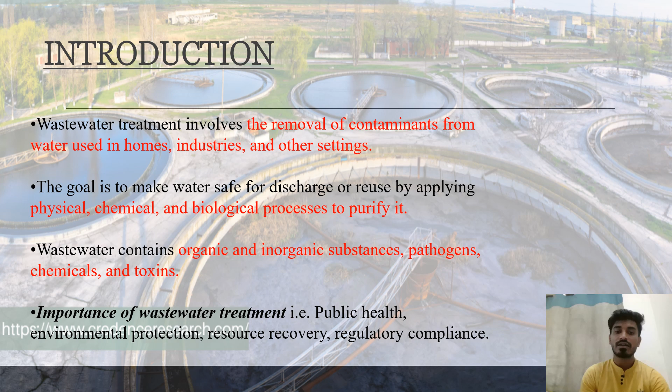What is the importance of wastewater treatment? It protects public health. If the public uses wastewater without any treatment, it causes many health issues. In wastewater there are many pathogenic bacteria and microorganisms that can affect human health. So we can protect public health, and also provide environmental protection without pollution, resource recovery, and regulatory compliance.

The fundamentals of biological treatment. Due to some fundamentals, the wastewater can be purified, like microbial breakdown. In microbial breakdown, microorganisms, primarily bacteria, degrade organic matter into simple compounds. They decompose and remove the organic pollutants from the wastewater, converting whatever pollutant particles are present into simple compounds.

And by using aerobic and anaerobic treatment, in the presence or absence of oxygen, we can also purify the wastewater. In the growth system, activated sludge, where the microbes grow in the polluted water, settles the polluted particles at the bottom of the treatment plant, or in biofilms, the particles are attached to the surface.

In nutrient removal, the process is used to remove nitrogen and phosphorus to prevent water pollution. In the water there is a lot of phosphorus and nitrogen, so through the nutrient removal process we can remove the nitrogen and phosphorus from the wastewater.

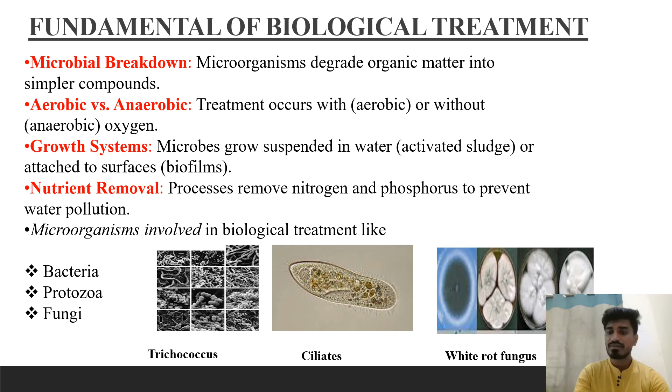Here the processes are the aerobic treatment process and the anaerobic treatment process. In the aerobic treatment process, aerobic bacteria are used. These are bacteria that can purify the water in the presence of oxygen. This is a biological technique that breaks down the organic impurities and other pollutant particles in the wastewater, like nitrogen and phosphorus. It can filter by using oxygen, in the presence of oxygen.

And there are some systems to treat the wastewater, including activated sludge and fixed bed reactors, bioreactors, and membrane bioreactors. These are the systems that can be used in the wastewater treatment.

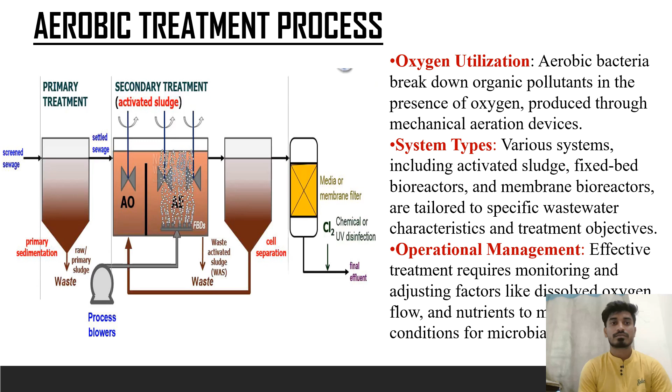If you observe the anaerobic treatment process, it is a biological process where the microorganisms degrade the organic contaminants in the absence of oxygen. This is a basic anaerobic treatment cycle where the wastewater enters into the bioreactors. These bioreactors contain thick and semi-solid substances. Those are known as sludge, which are comprised of anaerobic bacteria and other microorganisms.

Here the anaerobic bacteria digest the biodegradable matter present in the wastewater, resulting in an effluent with low biological oxygen demand and chemical oxygen demand, as well as biogas byproducts. Through this process, we can also produce byproducts like biogas and so on. Anaerobic wastewater treatment is used to treat a variety of industrial effluent streams from agriculture and food and beverages, as well as municipal sewage sludge.

And how does the anaerobic treatment process work? In anaerobic wastewater treatment, the process consists of two stages. One is the acidification phase and one is the methane production phase. In the acidification phase, it breaks the complex organic compounds into simpler forms, short chain volatile organic acids. It converts them into short chain organic acids.

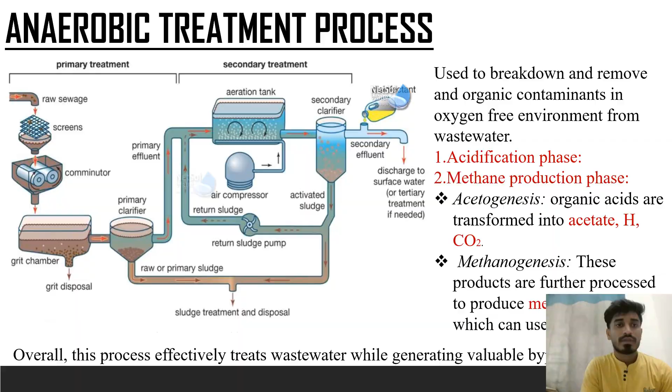If we see the chemical factors, there are substrate concentration and pre-treatment method. And the biological factors are inoculum and electrochemical effects. These factors influence the efficiency and functionality of microbial electrochemical systems in processes like wastewater treatment, energy production and resource recovery.

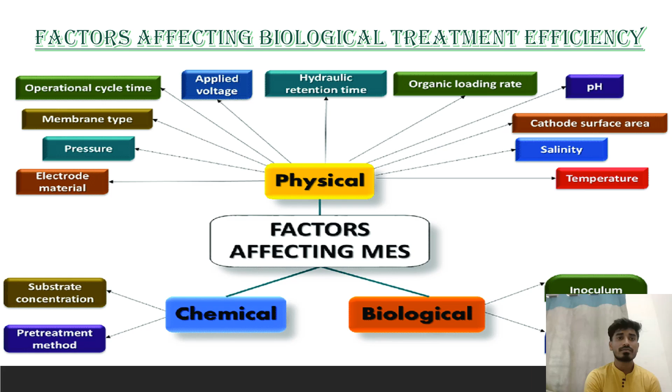And also energy production: through the anaerobic process, it can generate biogases like methane, which can be used to produce energy and reduce external energy needs. And if we shift to the limitations, it is very sensitive to changes; the microbes are sensitive to shifts in temperature, pH, and oxygen. And sludge management: it produces excess sludge that requires extra handling, treatment, and disposal, adding to operational complexity. And also it has a slow start; it takes time for microbial communities to grow and adapt in the treatment.

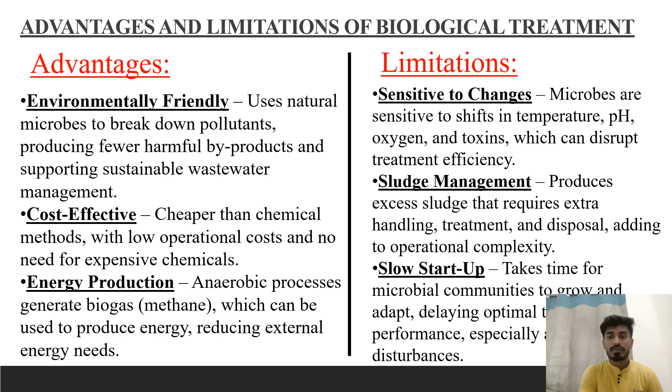If we observe the case studies and applications of biological treatment, there are some applications like large-scale treatment. In large-scale treatment, we are treating worldwide. There are like 1.4 billion gallons of wastewater we are treating daily worldwide. And also by the use of aeration tanks, it can support the microbial activity for breaking down organic waste in the form of sludge, like the activated sludge.

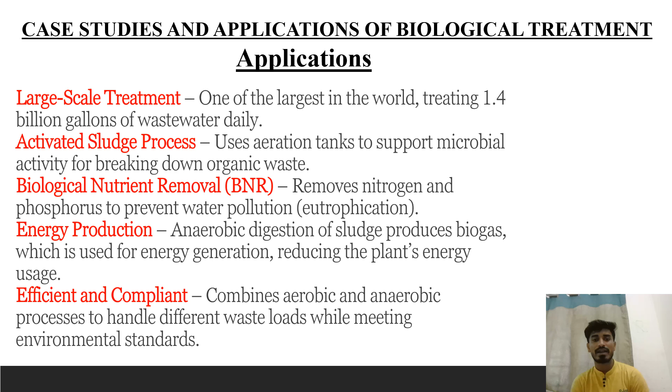And also it can remove all the nitrogen and phosphorus content in the wastewater to prevent water pollution. And also it can produce biogas, which is used for energy generation and reducing the plant energy usage, and it is also efficient and compliant. This combines aerobic and anaerobic processes to handle the different waste loads while meeting environmental standards. Nutrient removal.

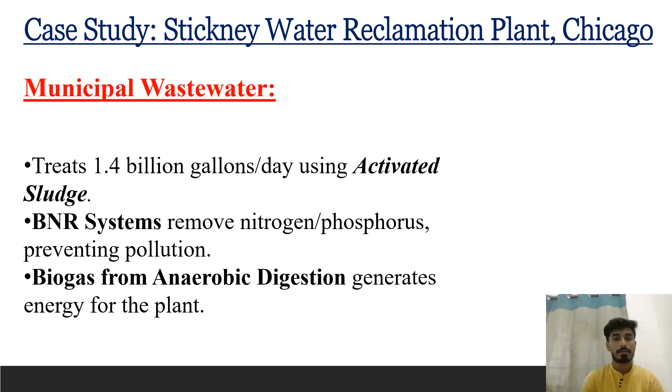And if you see the case studies like the Stickney Water Reclamation Plant, which is present in Chicago, they studied municipal wastewater. They treated daily 1.4 billion gallons of water per day, and they separated the sludge from the water by using BNR, biological nutrient removal system. They removed all the nitrogen and phosphorus containing particles in the wastewater, and they prevented environmental pollution. And also they produced many other byproducts like biogas, and they also generated the energy for the plants from anaerobic digestion.

And one more case study is industrial wastewater at the Nestle dairy plant, which is present in Mexico. They studied the industrial wastewater. In their study, they observed anaerobic digestion from the wastewater treatment. It treats the high organic loads and produces biogas, and also it is cost-effective and eco-friendly with reduced sludge production in the wastewater. And one more is agricultural runoff, which they studied in the Florida Everglades wetlands.

They studied agricultural runoff. Here they constructed the wetlands by removing all the nutrients from the wastewater, which are used in the agricultural field. And also it is a sustainable and low-energy solution, improves water quality and prevents eutrophication. Eutrophication is nothing but excessive enrichment of water bodies where nutrients like nitrogen and phosphorus are contained heavily. It leads to dense algal growth. This algal growth can result in oxygen depletion, harming aquatic life and disturbing the ecosystem.

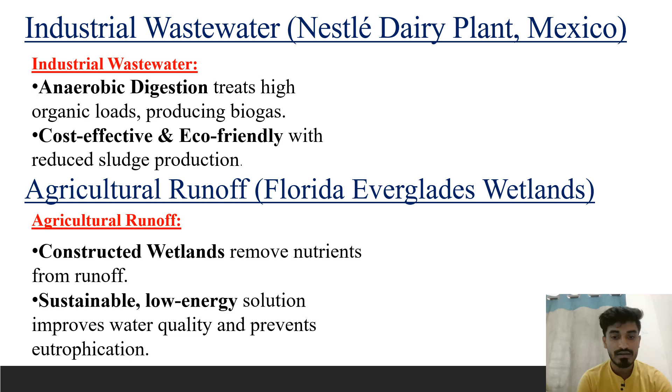If we talk about the challenges and the future directions, there is enhanced biological phosphorus removal. Here we use specialized bacteria to remove the phosphorus and other nitrogen contents in the wastewater efficiently, and also it reduces chemical use, making the process more sustainable. And one more thing is the membrane bioreactor.

In membrane bioreactors, through membrane filtration, we can purify the wastewater. We can filter all the pollutant particles in the wastewater, and we can make wastewater into pure water. And it offers high-quality effluent suitable for water reuse. These membrane bioreactors are suitable for water reuse again after the filtration.

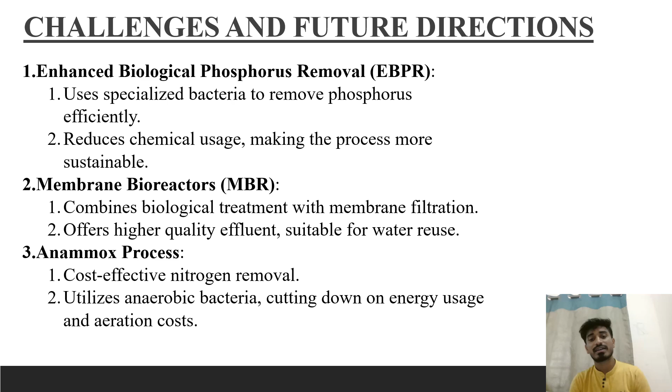Anammox process. This process is very cost-effective to remove nitrogen, and it utilizes anaerobic bacteria. Here, the bacteria can cut down on energy use and aeration costs. One more thing is the bioelectrochemical system. The bioelectrochemical system converts organic pollutants into electricity using microbes and opens the door for energy recovery from wastewater. And microalgae-based treatment: here, algae can help in nutrient removal and biomass production, and can also produce biofuels as byproducts, enhancing the sustainability.

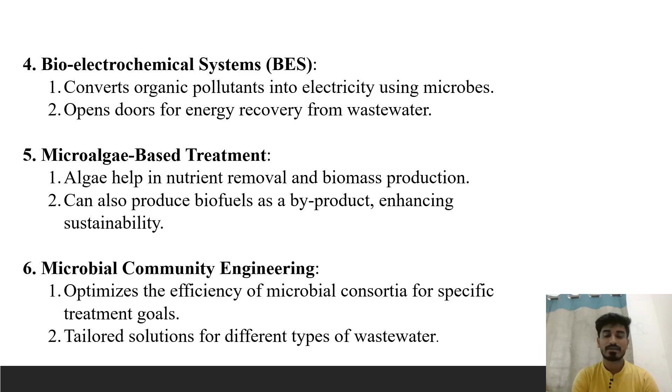And microbial community engineering optimizes the efficiency of microbial consortia for specific treatment goals, and it tailors the solution for different types of wastewater.

Finally, the conclusion is that biological treatment of wastewater is a cornerstone in sustainable environmental management, utilizing natural microbial processes to effectively degrade pollutants and improve the water quality for further reuse. Its importance lies in its ability to minimize chemical use, promote energy efficiency, and offer long-term, eco-friendly solutions to wastewater challenges. Future advancements such as algae-based systems, anaerobic digestion, and bioelectrochemical approaches hold great promise for enhancing treatment efficiency, resource recovery, and energy generation, making biological treatment a vital component of the circular economy in environmental management.